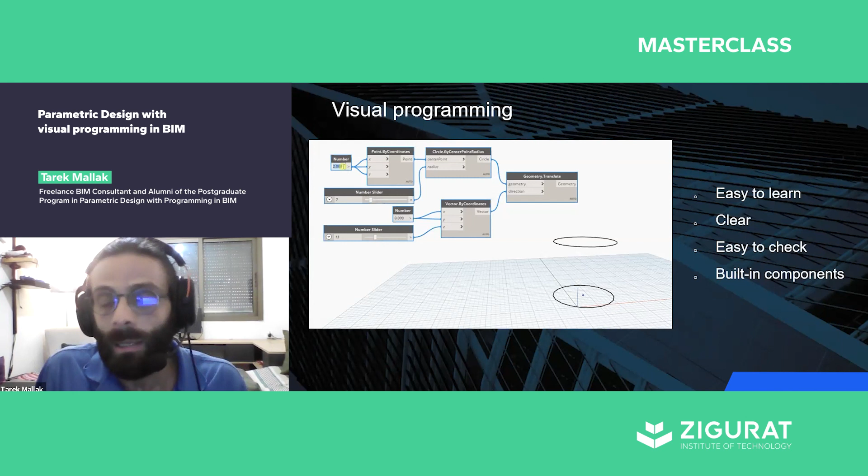What is visual programming? As you can see in this example, we have a small example of maybe changing a circle, translating it, changing its radius, changing its center. This visual programming is mainly built by components. These components are open source that you can find anywhere online, basically. It's easy to use, it's very clear, it's easy to check, especially if you are making a lot of complicated programs. As you can see, it's easy to maneuver, and this is the main benefit of visual programming.

It uses less CPU memory, and it has open source libraries. For example, in Python it's a language that is used worldwide by programmers, so you'd find a lot of functions, loops, and classes that can help you create certain functions that can be defined for the specific project that you have.

Combining this textual and visual programming can give us a lot of benefits. The first one I'm going to talk about is standardized and quick production. Why do we need standardized and quick production? We can start by maybe automation, that's the basic level, automation for repetitive tasks.

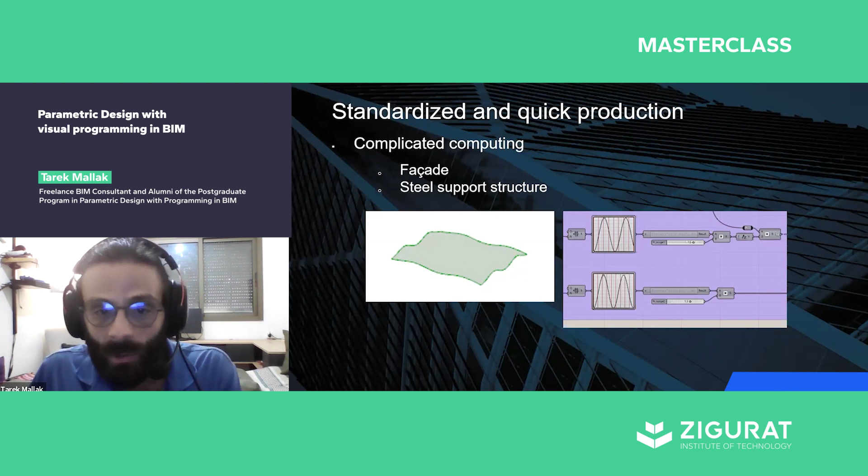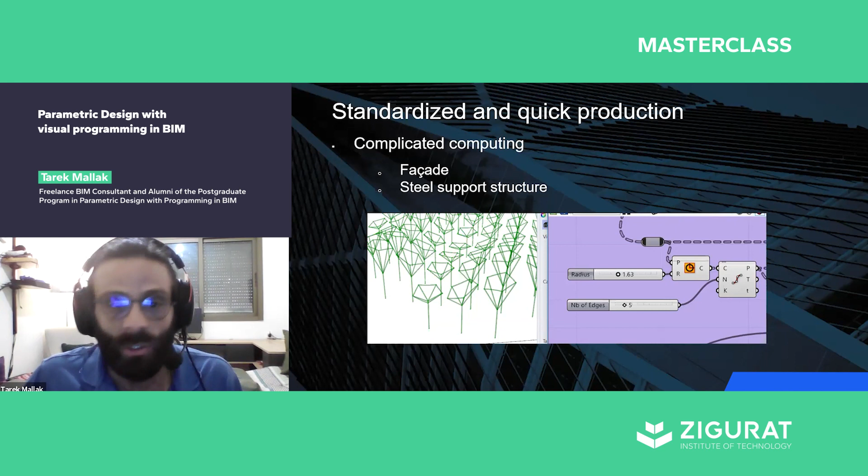We can use this for more complicated computing and complex tasks. Let's say we want to create a facade, or a glass cover for a building, and we'd like to undulate it in a sine wave or exponential curve, whatever the user would like. All of this would be a huge task to do manually. However, with a small visual script, this shape can be edited and modified very easily. We can add a steel structure too, just by changing the number of edges or the radius, and create a very complicated form. That's very important for civil engineers or architects, even for facades.

Why do we use this standardized and quick production? What is the need for this? It minimizes the errors and mistakes we can make in creating any plan or project. It minimizes production time and cost. It also reduces the training needed, because to give uniform quality we need consistent training for every new employee, and even for employees who forget some tasks. When you automate tasks, you overcome these difficulties. At the end, there's huge importance and benefit in interoperability, though I won't talk about that right now - it will come later, in its time.

The second facet I'd like to talk about is model flexibility. Here's an example where a building can change its shape by changing some of the parameters - that's the origin of the word parametrization. We can change the level heights, the number of floors, or the elliptical form of that specific building, for example.

This is a great tool to use during concept design, or basically in the first stages of a project, especially when talking to a client or needing to visualize options or scenarios for our projects.

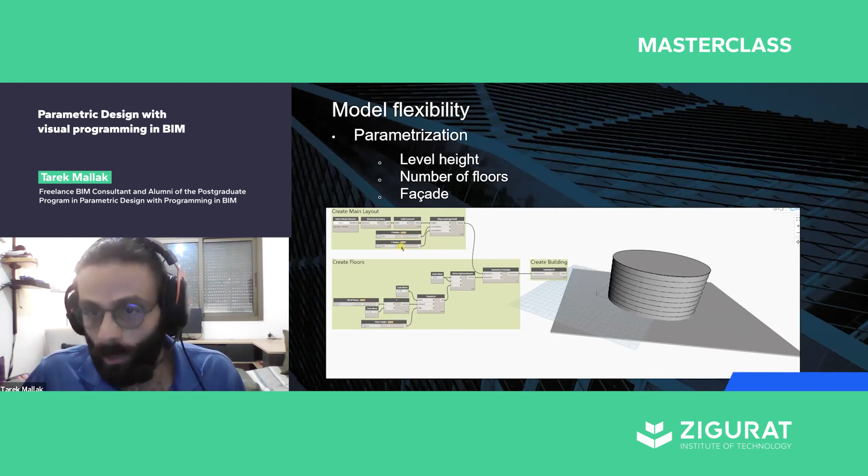We can maybe add other things here. As you can see in this example, a small script can make a scale for these floors. In this example, I gave it an undulation also based on a sine wave that can change exactly by changing a parameter.

That can help us make a rotation, or even - most importantly - a recursion, because that cannot be done manually. It's a very hard task to do by hand. However, it's simple to do with a script like this, especially if we know textual programming, because when we use Python, for example, we can find functions online that someone else has created and tweak them a bit.

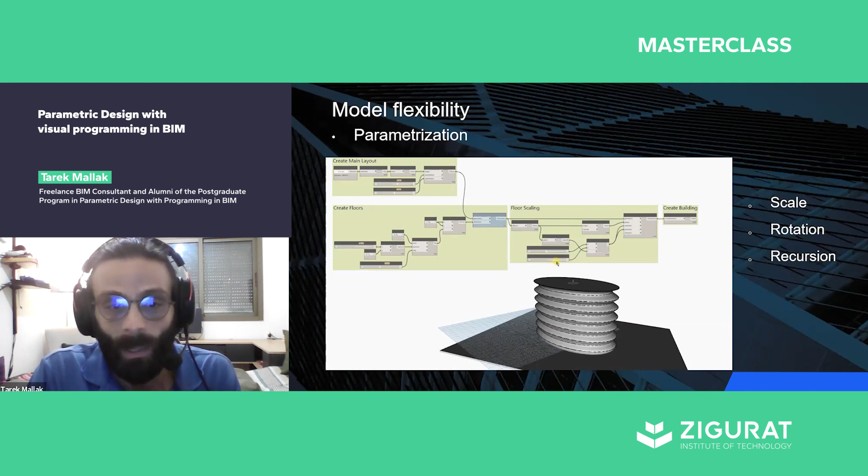This is in order to find a bigger, more holistic approach to your project. What this flexibility adds is a way to visualize different scenarios. If an architect or engineer is trying to visualize something, it can help us see a lot of scenarios in front of us.

That also gives us a quick response to our client's needs, because architects know this well. When you go to a client to propose your project, often you'll get feedback and have to go back and change floor heights, the number of floors, or in that earlier example, maybe the length of a building.

These are examples that exist a lot in our trade. So if we have such a program to present to our client, we can change our project right there with them, adjusting the basic form, especially in the first stages of design. It also allows us to create more complex forms, like recursion or a sine wave - it's up to everybody's imagination at this point.

The third facet I'd like to talk about is a checkup for errors.

I will not go into details in everything of this, but we all have to respect norms and standards in our trades, whether it's a separation distance or a floor area ratio, or maybe we have some constraints like gross area or a volume that we should not exceed or go under. And we have some errors and warnings that we would like to impose on ourselves, maybe a placement of things or duplication of tags or names that we don't want to have, small mistakes that can happen when we are focusing on the details of some task.

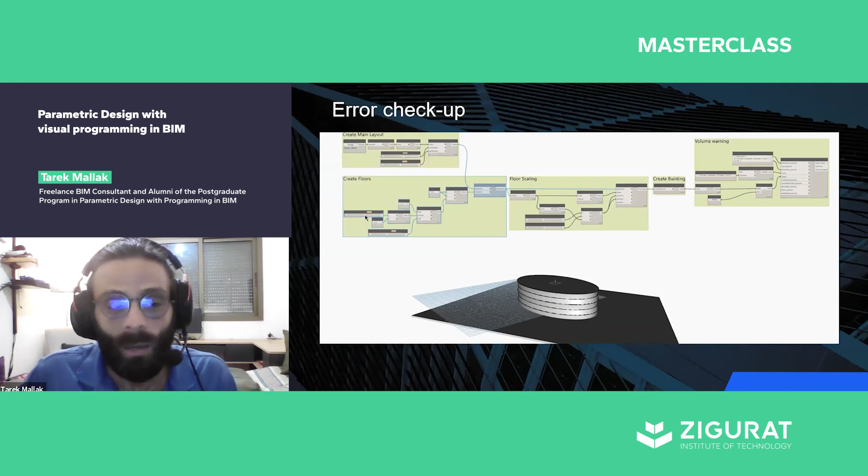So, for example, I have added a volume warning to that script, and as you can see, when we change the number of floors to maximize it at a certain point, if we exceed the limit that we have added, it will give us a warning, and that is a very easy way to know that we have made a mistake somewhere in our project.

And the last facet, and that is the most important, is information management. We live in the era of BIM, and that is information. Let's take, for example, a project that throughout its lifetime has a lot of stakeholders who will deal with it, whether giving information or taking information from what we call a CDE, a common data environment. This common data environment is the whole model in the BIM approach.

It contains every piece of information that a contractor needs, or an architect that puts there information that maybe the MEP engineer will need, or the manager will take, or maybe the quality control has to check. So having a standardized information flow is essential to have a CDE that is consistent and that is working in a standard way throughout the life cycle of the project.

Everybody who worked on a project delivery knows that the handover documents always get missed. The guarantees don't arrive on time. The installation manuals maybe arrive after the installation. So creating this CDE with a standard information flow allows us to fix all these problems.

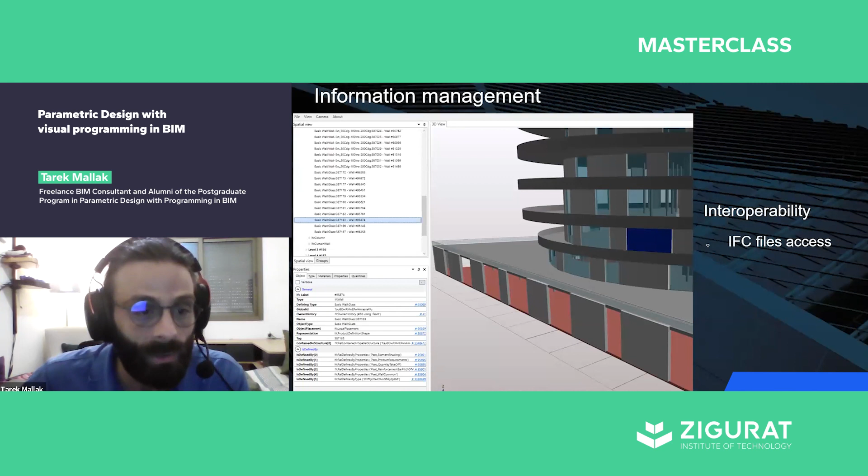If we look at this IFC schema, I'm not going to go into details—I know how complicated it is. But here you can see the wall has an owner history, a name, a description, a type, a placement, exactly the ones we saw in the previous slide. In this slide we see everything: the name, the representation, it all exists in this IFC schema. As long as we learn how to manage and work with this IFC schema, we can work with the elements in the IFC file without opening it in Revit or Bentley or whatever.

So if you look at something like this, it's called OpenBIM. It's a small script that works on slabs and levels and creates a schedule for it. This can be run from the PC without the software, without Revit, without anything. It accesses the IFC file directly, and we can look at any type of info we want, treat it any way we want, and put it in an Excel sheet or however we'd like to present it.

This information management allows us to plan better, because every stakeholder has input on this file, on the CDE, so we do not miss information. Whatever constraints we have, anyone can say they have these constraints. Anyone can put info there, anyone can take info from there, anyone can comment on it, whether it's the QA, the facility manager, the owner, or the client. We can plan better as long as our model is shared by everyone and everyone can access it the same way, regardless of what software they're using.

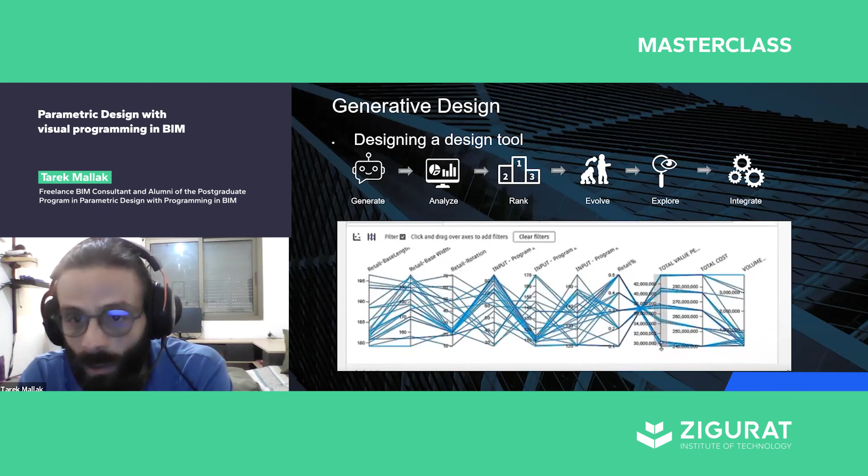At the end, before the end, comes the human decision, and that is the exploring of these scenarios. The user will have to interfere at this moment and look at these different scenarios and choose what is the most applicable one, what is the most optimal solution that they want, and that is not a task that the script can do on itself. After taking this decision, after knowing what solution we would like to take, we can integrate it in our model.

And this is a case study created by Evolve Lab for optimization for view orientation.

Generative design basically is used to solve oppositional problems. Let's say we need to look at functionality versus cost, or in a car park, we would like to see how many cars we can fit, but at the same time we would like ease of access for a luxurious car park. Or take a school, where rooms have to be functional next to each other in a certain way, but it's very important to have fire exits, to have a short route for that fire exit.

These two different parameters can be opposed to each other, exactly like this study shown here, made by Evolve Lab for optimization for view orientation. It's the orientation, the area, the rotation, the angle that we want in order to have maximum sunlight, for example. And that is very important in order to make a good decision.

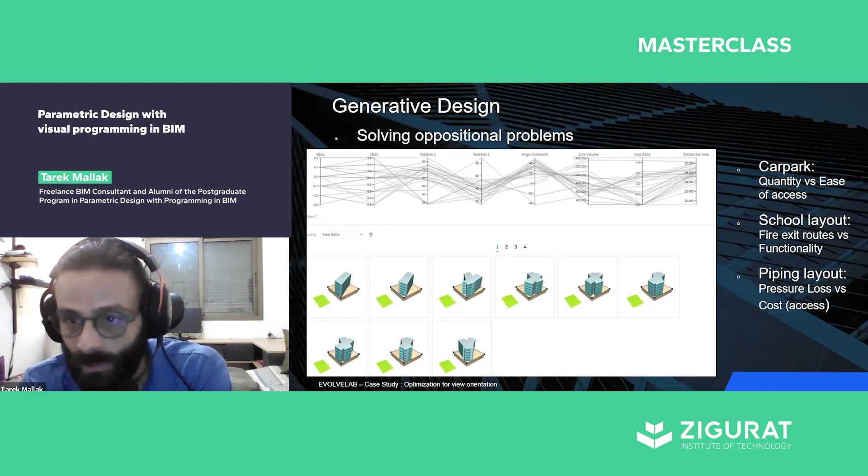And even these types of scripts, the generative designs, are used in industries such as cars these days, for aerodynamic flow versus weight of the car, for example.

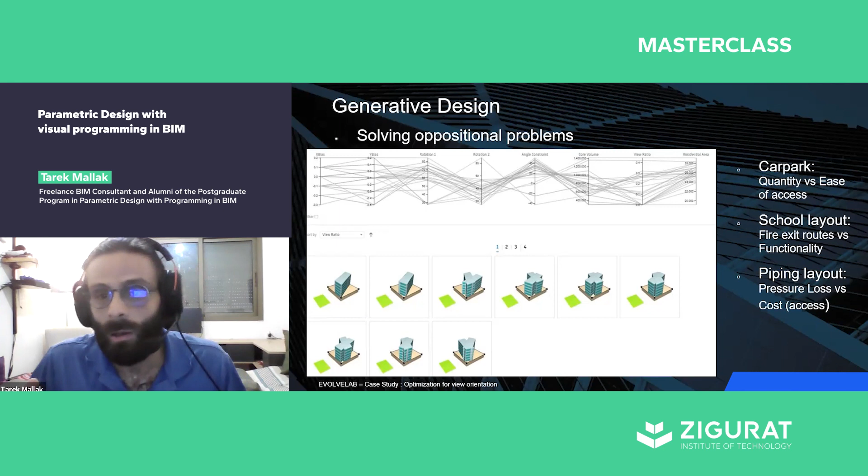And finally, I would like to thank everyone. And if there's anything that anyone should take from this presentation, it's to maybe learn some programming, because that is always becoming the end goal of everything here.

Thank you, Tarek. Thank you. Many thanks for your insightful talk, I really enjoyed it. So we have some questions here, maybe we can do some questions now for you. Yes, sure. Okay.

So the first question: from your point of view, what would be the greatest advancement or improvement professionals working in the field of parametric design can expect in the next few years, in your vision?

In parametrization, we can actually see a variety of solutions, and we live in a world right now where we cannot afford to build with any cost that we like. That has been the case for a long time, but right now we live in a very energy efficient world. We have to look for a green solution. We cannot just throw money away for any kind of project. We have to study the most efficient option, and that is an incredibly important topic today. We need sunlight, and as shown in the last example of sunlight and orientation, that is very important in order to maximize the sunlight in our offices. That would reduce heating, that would reduce the energy we put on electricity. This is very important in today's world. Everything is changing towards that, and we cannot just simply do a scenario that we have in our head, because as we can see, we all can propose scenarios. However, seeing this variety of scenarios in front of us, all these solutions, and every single one of them measured, that would give us a greater tool to pick the most efficient design in our case.